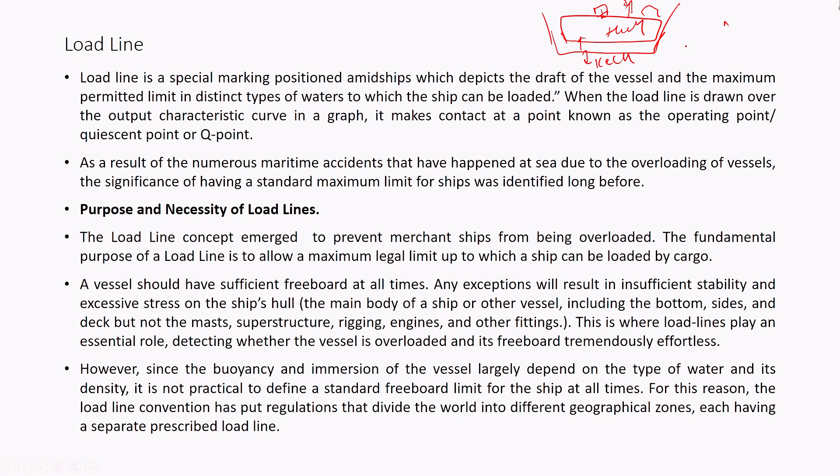So this is where load lines play an essential role in detecting whether the vessel is overloaded and its freeboard effectiveness. However, since the buoyancy and immersion of the vessel largely depend on the type of water and its density, it is not practical to define a standard freeboard limit for the ship at all times.

Now, as I have already told you, the density of the water changes depending upon the weather conditions of a particular geographical area. Since the buoyancy and immersion of the vessel largely depend on the type of water, and since there are different types of water, there cannot be one fixed mark of a load line based upon the tonnage capacity of the ship. Even if the tonnage capacity of the ship is similar, the load line will differ for all of these ships depending upon the type of water it is going to sail in.

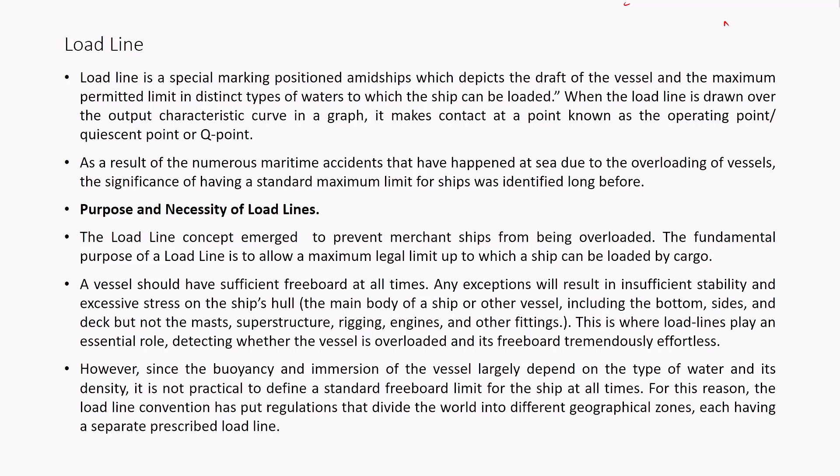So for this reason, the load line convention has put regulations that divide the world into different geographical zones, each having a separate prescribed load line. Now, in order to understand load line marks and types, let us go through certain important terminologies and have an initial understanding of the load line and the drawing of the load line.

A load line is a special marking positioned amidships. All vessels of 24 meters and more are required to have this load line marking at the center position of the length of the summer load water line. Now, in these last three words, summer load water line, this depicts a standard weather condition which is known as summer. So if the weather condition is that of winter or extreme winter, this will shift a little bit.

So as far as the summer load water line conditions are concerned, in order to draw the load line, we will take the center of the ship. So if it is 24 meters, 12 meters from the front or bow side, or 12 meters from the back side, wherever this coincides in the middle, we will have the center position of the length of the summer load water line.

Now, from the center point we draw a vertical line and also a horizontal line in order to identify the load line of that particular ship. Standard load line marking applies to all types of vessels, and distinct from standard load line marking, we have timber load line markings, which apply to vessels carrying timber cargo. So for timber we have a different load line marking.

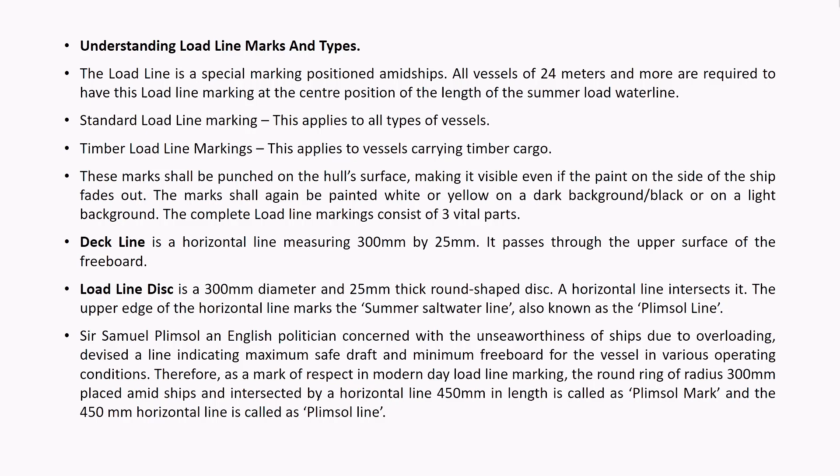As a mark of respect, in modern day load line marking, the round ring of radius 300 mm placed amidships and intersected by a horizontal line 450 mm in length is called the plimsoll mark, and the 450 mm horizontal line is called the plimsoll line.

So, we have the pictorial representation here now, and we will start with the deck line first. As you can see, the upper portion of the freeboard area has the deck line, which is 300 mm in length and 25 mm in breadth.

Now, from the center of the deck line, we will draw a vertical line. As you can see, it comes down, and we will identify the assigned freeboard area. So, this particular line is the assigned freeboard area.

If this is the assigned freeboard area, then we will look at the center point up to where the assigned freeboard area functions, and from this particular center point, we will have a circle drawn.

Once the circle is drawn, we will have a straight line which is horizontal in nature, crossing through this circle, and the length of this line would be 450 mm, and the thickness would be 25 mm. This line is up to where the assigned freeboard area is available.

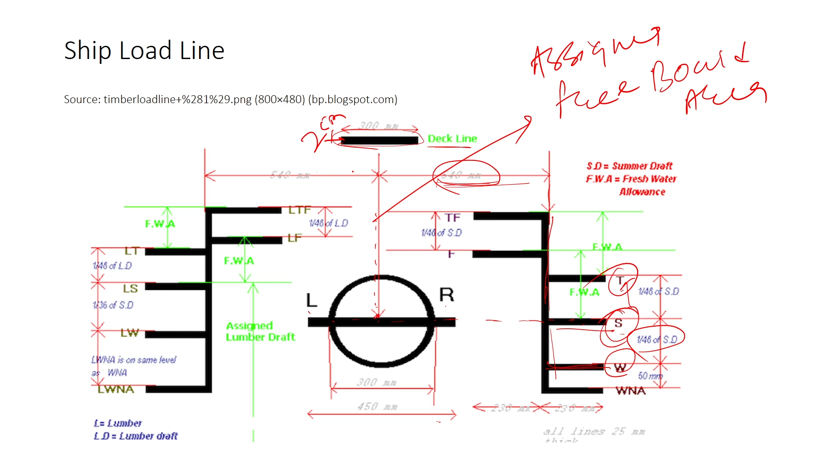Now what if the ship is sailing through the winter North Atlantic region? In extreme winter conditions, the weight of the ship has to be further reduced. So after reducing the winter load line by 1/48th, a further 50 mm is to be reduced. Once you reduce that further 50 mm from the winter load line, you get the winter North Atlantic load line.

Ships don't only sail in sea water, sometimes they sail through fresh water. When ships sail through fresh water, what load line is to be drawn? Again we take the summer draft point and increase it by 1/48th to get the tropical load line, and a further 1/48th of the summer draft is to be increased from there. Once you increase that further 1/48th, you get the load line for the ship carrying load in fresh water.

F represents fresh water. Further, if the ship is travelling not only in fresh water but in tropical fresh water, the load can be increased to an even larger extent, again by 1/48th of the summer draft. From the freshwater load line, this gives us the load line for tropical fresh water.

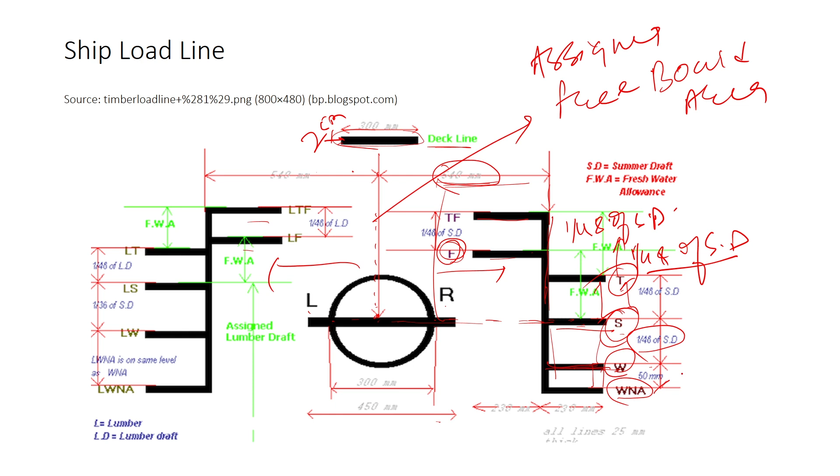WNA represents Winter North Atlantic, marked 50 mm below the winter load line, as we have seen here, 50 mm distance from the winter load line. It applies to voyages in the North Atlantic during the winter months, above 36 degrees of latitude.

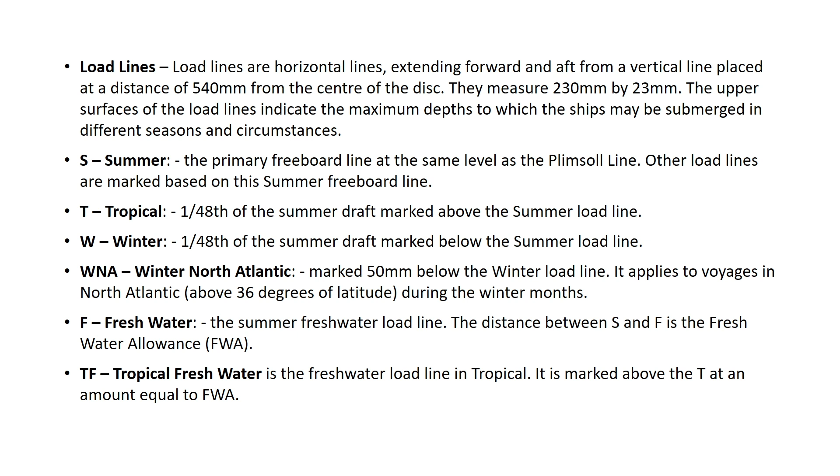F represents fresh water, the summer freshwater load line. The distance between S and F is the fresh water allowance. Then we have TF, tropical fresh water, which is the freshwater load line in tropical regions. It is marked above T at an amount equal to the fresh water allowance.

Now, what does the International Convention on Load Lines say? We will just have a glimpse, because it has been implemented in the domestic legal system as well. So we will see how the implementation of the Load Line Convention comes into being by looking at the Merchant Shipping Act amendments.

If you look at the International Convention on Load Lines 1966, it has long been recognized that limitations on the draught to which a ship may be loaded make a significant contribution to her safety. These limits are given in the form of freeboards, which constitute, besides external weathertight and watertight integrity, the main objective of the convention. It is the first international convention on load lines, adopted in 1930.

So based on this particular convention, the 1930 convention, an upgrade was made in 1966, based on the principle of reserve buoyancy, although it was recognized even then that the freeboard should also ensure adequate stability and avoid excessive stress on the ship's hull as a result of overloading. With the advancement of scientific and technological developments, more accuracy has been brought into the drawing or placing of load lines.

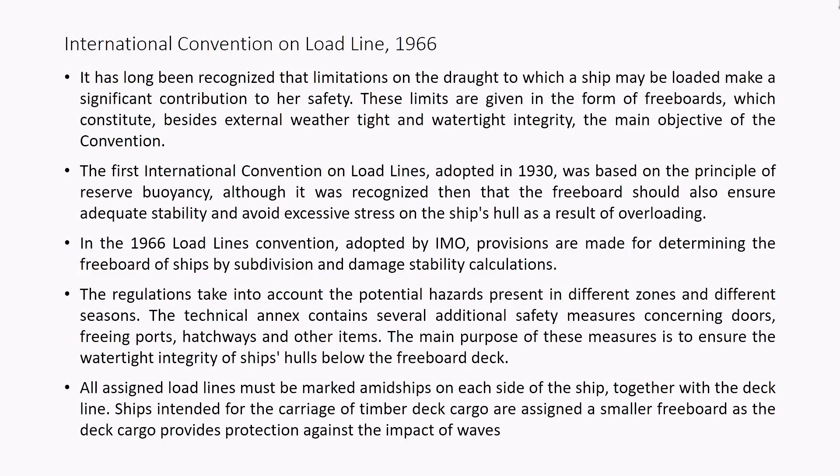The technical annex contains several additional safety measures concerning doors, freeing ports, hatchways, and other items. The main purpose of these measures is to ensure the watertight integrity of ships' hulls below the freeboard deck. All assigned load lines must be marked amidships on each side of the ship together with the deck line. Ships intended for the carriage of timber deck cargo are assigned a smaller freeboard, as the deck cargo provides protection against the impact of waves.

The convention includes 3 annexes. Annex 1 is divided into 4 chapters: chapter 1 is general, chapter 2 talks about conditions of assignment of freeboard, chapter 3 talks about freeboards, and chapter 4 talks about special requirements for ships assigned timber freeboards. Annex 2 covers zones, areas and seasonal periods.

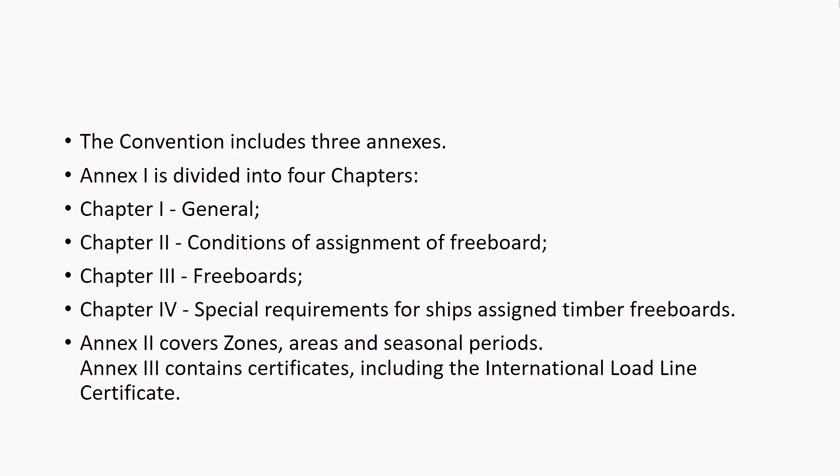Annex 3 contains certificates including the International Load Line Certificate. These are the international norms and requirements that all flag states must comply with. What are these requirements? Some of which we have already gotten a glimpse of while drawing those load lines.

For example, the conditions with respect to seasons and regions, the conditions with respect to the allowing freeboard area, and Annex 3 talks about implementation of all these conditions, wherein all ships must have a load line certificate. That is, the certificate must be issued by the flag state authority, specifying up to what limit load can be placed upon the ship. Now we will see this compliance as far as India is concerned.

As far as the Indian context is concerned, we have the Merchant Shipping Act 1958, which mentions and specifies rules and regulations pertaining to load lines. Now what does it say? Starting from section 310, it discusses and places rules and regulations pertaining to load line.

Section 310 says: ships exempt from provisions relating to load lines. It says, save as otherwise provided in this section, the provisions of this part relating to load lines shall apply to all sailing vessels as they apply to ships, and accordingly the expression 'ship' in the said provisions of this part shall be construed as including a sailing vessel. So a broader understanding of the word ship has been given, and it includes sailing vessels.

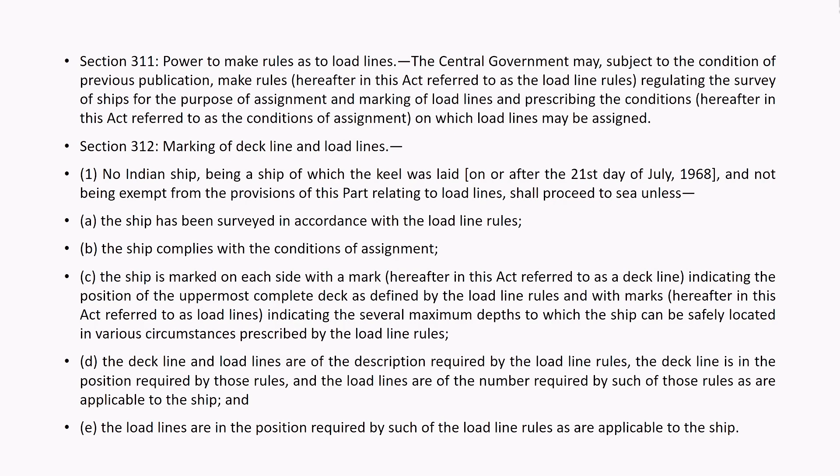The deck line and load lines are of the description required by the load line rules. The deck line is in the position required by those rules, and the load lines are of the number required by such of those rules as are applicable to the ship, and the load lines are in the position required by such of the load line rules as are applicable to the ship.

Section 313 talks about submersion of load lines. An Indian ship not being exempt from the provisions of this part relating to load lines shall not be so loaded as to submerge in salt water when the ship has no list, the appropriate load line on each side of the ship - that is to say, the load line indicating or purporting to indicate the maximum depth to which the ship is for the time being entitled under the load line rules to be loaded. Without prejudice to any other proceedings under this act, any ship which is loaded in contravention to this section may be detained until she ceases to be so loaded.

Section 314 talks about maintenance of load line marks. No owner or master of an Indian ship which has been marked in accordance with the foregoing provisions of this part shall without reasonable cause fail to keep the ship so marked. So, it is upon the owner or the master of the ship.

No person shall conceal, remove, alter, deface or obliterate, or suffer any person under his control to conceal, remove, alter, deface or obliterate any mark placed on any such ship in accordance with the foregoing provisions of this part, except with the authority of a person entitled under the load line rules to authorize the alteration of the mark, or except for the purpose of escaping capture by an enemy or by a foreign ship of war in the exercise of some belligerent right.

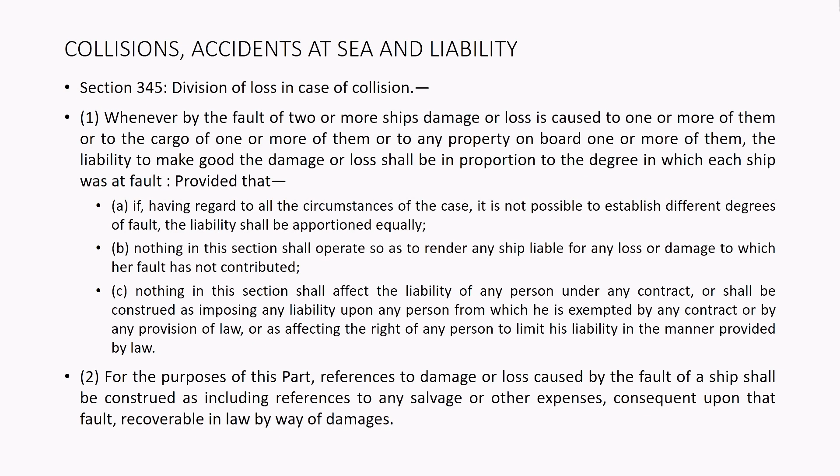Nothing in this section shall operate so as to render any ship liable for any loss or damage to which her fault has not contributed. Nothing in this section shall affect the liability of any person under any contract, or shall be construed as imposing any liability upon any person from which he is exempted by any contract or by any provision of law, or as affecting the right of any person to limit his liability in the manner provided by law.

Further, section 346 talks about damages for personal injury. Whenever loss of life or personal injury is suffered by any person on board a ship owing to the fault of that ship and of any other ship or ships, the liability of the owners of the ships concerned shall be joint and several. Nothing in this section shall be construed as depriving any person of any right of defense on which, independently of this section, he might have relied in an action brought against him by the person injured.

Or any person entitled to sue in respect of such loss of life shall affect the right of any person to limit his liability in cases to which this section relates, in the manner provided by law. Section 347 talks about right of contribution.

Now, this is a very important provision wherein contribution of different persons or juridical personalities comes into being. Whenever loss of life or personal injuries are suffered by a person on board a ship owing to the fault of that ship and of any other ship or ships, and a proportion of the damage is recovered from the owner of one of the ships which exceeds the proportion in which he was in fault, the said owner may recover by way of contribution the amount of the excess from the owners of the other ship or ships to the extent to which those ships were respectively in fault, provided that no amount shall be so recovered which could not, by reason of any statutory or contractual limitation of or exemption from liability, or which could not for any other reason have been recovered in the first instance as damages by the persons entitled to sue thereof.

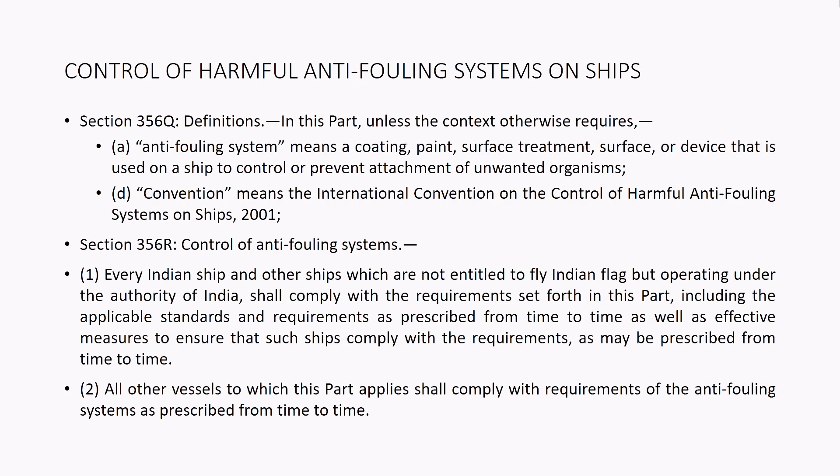And section 356R says control of anti-fouling systems. Every Indian ship and other ships which are not entitled to fly Indian flag but operating under the authority of India shall comply with the requirements set forth in this part, including the applicable standards and requirements as prescribed from time to time, as well as effective measures to ensure that such ships comply with the requirements as may be prescribed from time to time. All other vessels to which this part applies shall comply with requirements of the anti-fouling systems as prescribed from time to time.

Section 356S says issuance of International Anti-Fouling System Certificate. No Indian ship or other ships entitled to fly Indian flag or operating under its authority, which is of 400 gross tonnage and above, shall engage in international voyage unless there is on board in respect of that ship a certificate issued by the DG to be called International Anti-Fouling System Certificate, in such form, for such duration, and subject to such procedures and conditions as may be prescribed. Section 356T says issue of anti-fouling system certificate for foreign ships in India and Indian ships in foreign countries.

And lastly, 356U talks about control of waste materials. Taking into account the international rules, standards and requirements, the central government shall prescribe the rules and take appropriate measures in its territory to require that waste from the application or removal of an anti-fouling system are collected, handled, treated and disposed of in a safe and environmentally sound manner by any person in India to protect human health and environment. So, anti-fouling system does serve a particular purpose, but at the same time it can also cause environmental degradation. So, that mitigation has also to be tackled by the flag state.

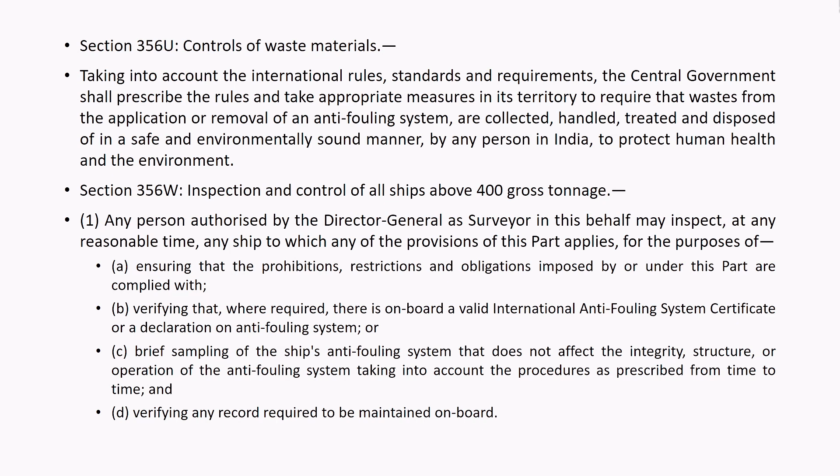Section 356W says inspection and control of all ships above 400 gross tonnage. Any person authorized by the Director General as surveyor in this behalf may inspect at any reasonable time any ship to which any of the provisions of this part applies, for the purposes of ensuring that the prohibitions, restrictions and obligations imposed by or under this part are complied with, verifying that where required there is on board a valid international anti-fouling system certificate or a declaration on anti-fouling system, or brief sampling of the ship's anti-fouling system that does not affect the integrity, structure or operation of the anti-fouling system, taking into account the procedures as prescribed from time to time, and lastly, verifying any record required to be maintained on board. So, these are the duties and functions of the surveyor as appointed by the Director General of Shipping in India.

So, this will be all as far as load lines, liability regime in brief, limitation of liability understanding, and anti-fouling system is concerned. I thank you for your patient listening.